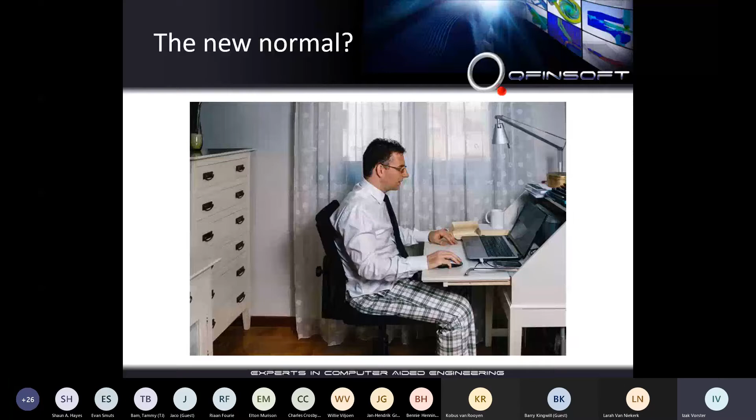A couple of other things have changed as well. We changed the way that we do washing. It was quite a challenge to do all the cooking and the dishes and everything at home for a long period of time. Some of you might have brewed some pineapple beer, or run out of wine during this time, but it was a challenging time. I think we'll never have a time like this again. It was an abrupt change to normal daily living. You really got to know your wife or your husband and your children. That was one of the challenges, to spend so much time together. But I think in the end, the lockdown has revealed a lot, and it's helped a lot too.

Just a little bit of perspective - this figure is from the 29th of September on the pandemic that we're currently facing. I think the world's reaction was very hectic to this, with reason. It's a serious virus. If you look over history at all the pandemics, I think we're still growing with COVID. We don't know how long this will last, so obviously businesses have changed to adapt to this and make sure that they can still be profitable.

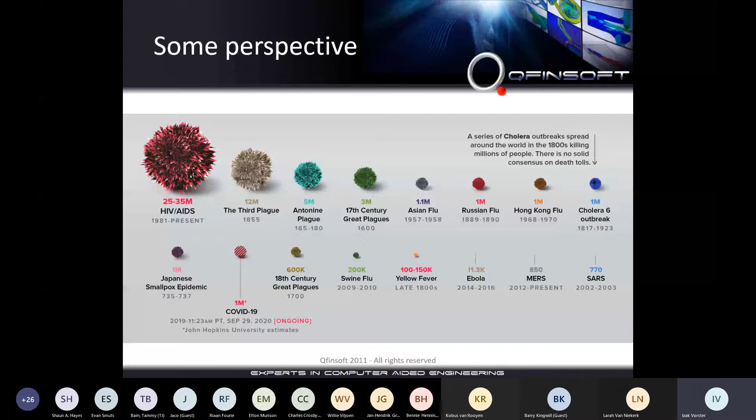Different ways of working, because we don't know how long this will actually take. Some research shows that there's always a recovery from these pandemics and economic crashes, and there are different ways this can happen - in L shapes, U shapes, W shapes and V shapes. It looks like the consensus is that it will take about 2 years to recover from this. We'll see how it recovers. Some countries have gone into a second lockdown period, so that might affect things as well. So there's a lot of uncertainty about this.

Hopefully we've got a bit of an U-shaped or V-shaped recovery that really just flattens things a bit and then it carries on growing again.

A bit more specific research for South Africa shows that we haven't had the greatest economic growth over the last couple of years, and they're predicting a bit of negative growth, 0.5%. Whether this will be the case, we don't know. We'll have to wait and see.

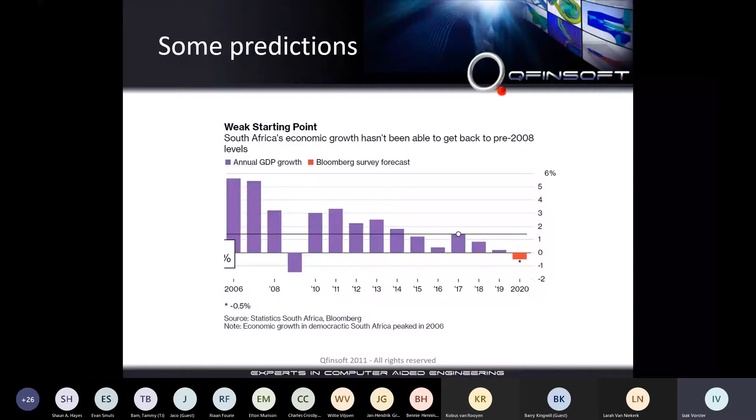But it does state a point: we have to change the way we work to be profitable and to keep on being effective and surviving this whole crisis. I think that's what most companies have done over the last couple of months. Unfortunately, some companies have taken pay cuts to still keep all the employees. Some companies closed down, unfortunately, which opens up other opportunities again. So it will be an interesting two years coming, I think, for South Africa.

And then the other thing that changed for me tremendously is, I'm a sales guy, so interaction with people is kind of my food every day. The social distancing impacted that a lot. I think the first time we all got back at the office for Spring Day Braai, we spent a lot of time just chatting and interacting with each other socially again. So I think it's something we miss.

Luckily we've got online. Imagine we didn't have any internet or anything during a pandemic like this and lockdowns. Can you imagine what life would have been and how depressed people would have been? I think we are made to interact with people. So that's why we have these online sessions, luckily, and we can interact with each other.

Things that we've seen from our clients mostly is a new way to work. There's about 80% of people working from home, from this report.

The cool thing for me of working from home was that there was no traffic. I drive an hour to work every morning, an hour back. And when I see two clients, there's at least three hours on the road. So that's five extra hours a day. I think I was more productive, I had more meetings a day. Some days I had six or eight meetings just because I didn't have to drive all this way on the roads with traffic and stress.

I think we are less stressed as well by working from home. It depends what you're doing. We saw a lot more meetings. A meeting was very easy to arrange, and people would allow you some of their time if it was a quick Teams meeting, like you guys today. So we appreciate that. I think that increased communication between departments especially.

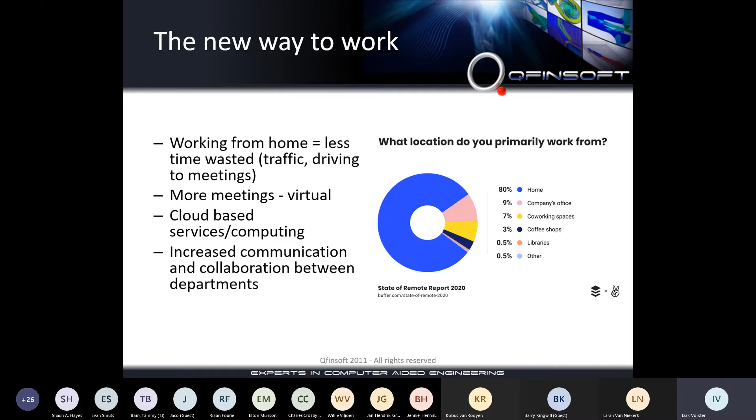We saw uptake of cloud-based services in computing. People were working remotely, so they didn't have access to some servers or solvers at work, so they had to work remotely. Some of the cloud computing was utilized, and there was a lot more collaboration. We had very cool meetings with departments and department heads down to the users, which I think was a very cool thing out of this COVID crisis.

The second thing we saw a lot is we got some cool software requests from people who wanted to do interesting things. In some industries there was a lot of time to restructure and rethink the goals and visions and where they want to go. There were a lot of new ideas, and that was good for us. So we had very cool projects that we provided support on, and people are definitely innovative in their thinking about how to improve their businesses, how to look at different simulation solutions to replace some testing, prototyping, etc.

We also saw the simulation complexity increase. The kind of technical support we got was a bit more advanced in most cases. I think those simulations that had been lying in a cupboard for a long time started coming out and people started using them. In general, I think we get increased complexity in simulation over the years as people get more advanced using the software.

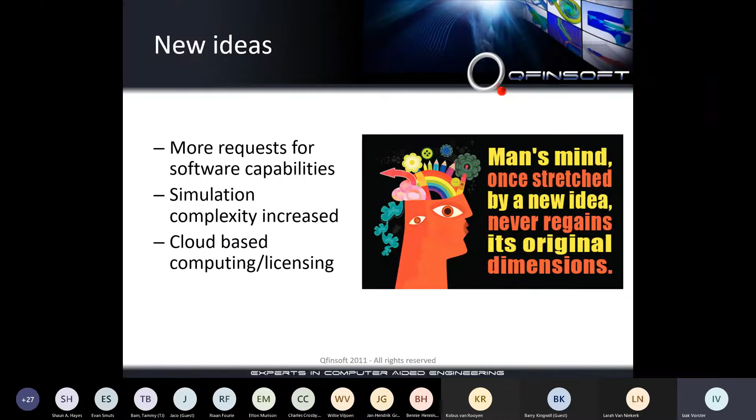And then obviously there was still a lot of cloud-based computing and licensing going on, with people who wanted to get new guys to use the software. Some people employed new guys and they wanted some access to the software.

The downside of what we saw, well it's actually an upside for us as well, was the uncertainty of this time. There's definitely economic uncertainty, so investment in new technology and tools was a bit lower than usual. I had some POs cancelled after being sent due to the uncertainty of this lockdown and when it's going to happen again. There were a lot of critical issues with cross-border work, so we felt that definitely.

The interesting thing though is that we managed to get more than 98% of our renewal rate going. So I thank every single customer on this call for still supporting us. I think it shows value in the technology and in the software, that people are seeing value in our software, I would like to believe. And that really helped us keep our team and pay our salaries and go forward. I think we are right, so thanks for that.

It's also a very indicative gesture to see how this technology is getting more accepted. We had a lot of meetings with senior design engineers and engineers that weren't used to simulation, which we'd never spoken to before, and they started to believe the results we're getting from simulation. They wanted to understand more. There was always a deeper dive into the technology after these meetings.

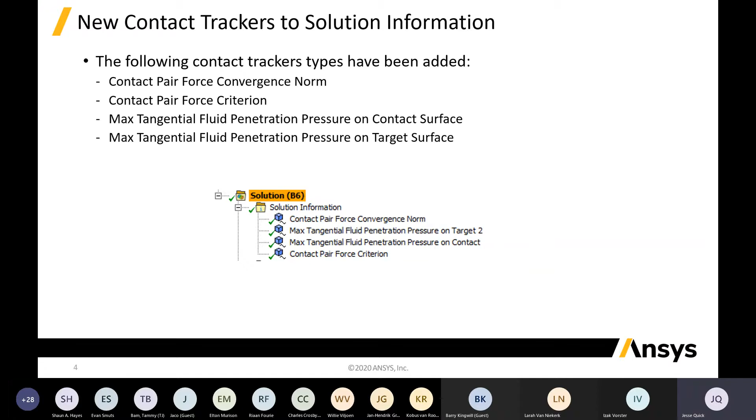Another useful addition is for sub-modeling of thermal analyses. You now don't have to go into Workbench and link up all of your systems. Now it's as easy as reading in your results file. If you know where your results file is, you can import your thermal stress and thermal loads, and add that directly into your simulation from mechanical, without even exiting the interface.

Now onto the mechanical graphics and post-processing. This is a small one, and it also ties into one of my favorite topics, scripting. They've done a lot of work on the scripting console. But now for post-processing, you can create custom legends with color bars, and use these for all of your designs. You can export the legend and read it in every time when you run your simulation. This allows very fine control over your legend and how you display your results, which is particularly nice for keeping things consistent for reporting purposes and so on.

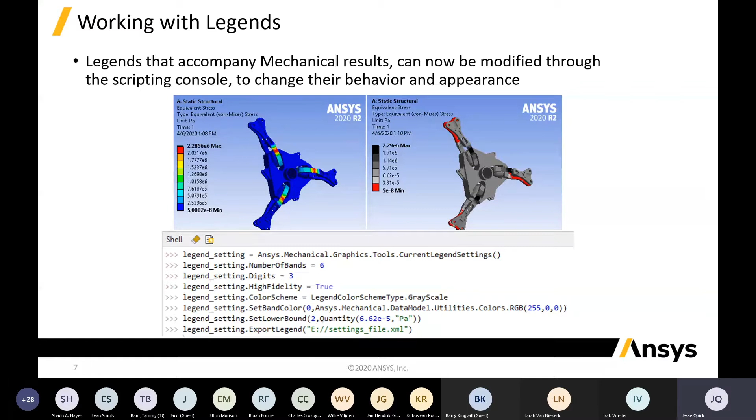Then onto mechanical, the MAPDL migration to mechanical. These are the more solver-related and contact-related improvements. One that stands out for me is the shell-to-solid contact enhancements. Now mechanical issues a SHSD MAPDL command for you, which improves shell-to-solid modeling. This is typically very nice because we like to use a lot of our shell models. When you use a bonded MPC contact, under the formulation, you can change this formulation, which allows additional settings to improve your solution accuracy.

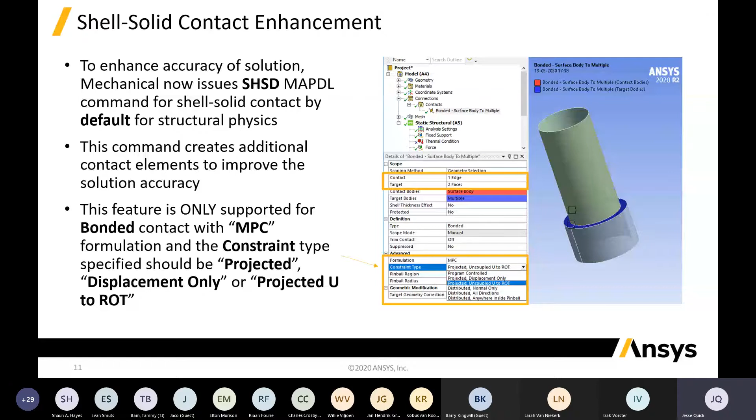If you're not exactly sure what that means, this slide shows an example where this has been used. If you look at the top left and top right of the model without the SHSD enhancements, you get this sort of wavy phenomena on the top left and right. Now with SHSD, we've got a much smoother model, which makes a lot more sense and looks a lot more accurate.

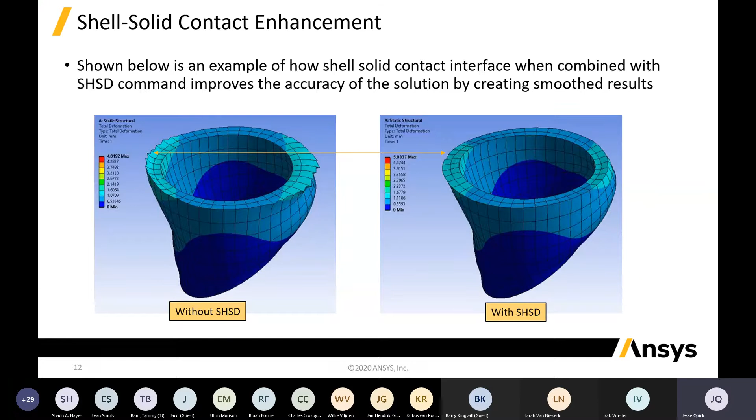Then we also have our quasi-static solution in the static structural analysis. For the static structural analysis, when you have a static analysis that occurs over a long period of time where it's actually transient...

So if you think about maybe you have a load on top of a can and you just keep pushing down, eventually that can's going to start to deform. Then you would want to use a quasi-static type of analysis, and this has been integrated directly, so it's very easy to go and turn it on. By default it is off, and you could easily go and manipulate these settings directly in Mechanical.

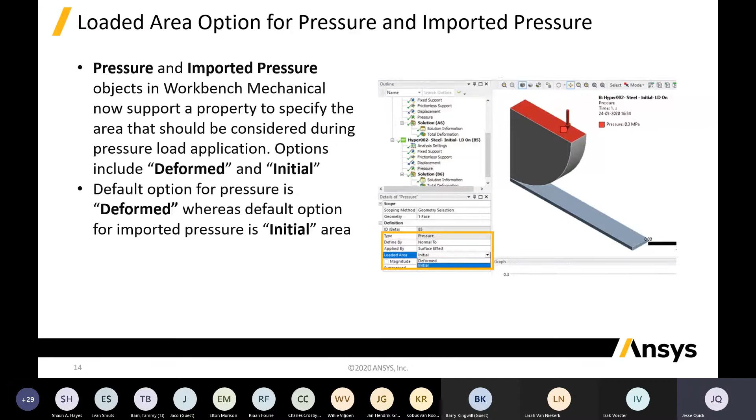Then loaded area options for pressure and imported pressure. This is quite nice. So now when you are applying a pressure or importing a pressure, this pressure will consider the change in shape of the model as it's being applied. So you can include deformed and initial, meaning it will either use the deformed area or the initial area. It is scoping the pressure throughout your simulation.

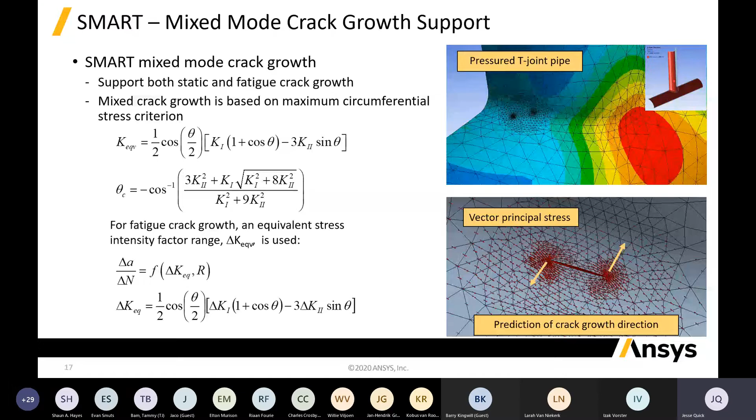Then one of the other key areas they're trying to improve a lot is the fracture and smart crack growth solver. With the smart crack growth solver, now we have mixed mode crack growth support. If you look at the visualization, what it does is support both static and fatigue crack growth, and there's all the equations there for reference. The mixed crack growth is based on the maximum circumferential stress criterion, and this is becoming more and more important to simulate these types of crack growth phenomena.

Additionally, this has been included within our fatigue model, so there are additional fatigue models: Walker's and Forman's equation. You can also input your own tabular table of data points that you would like to simulate.

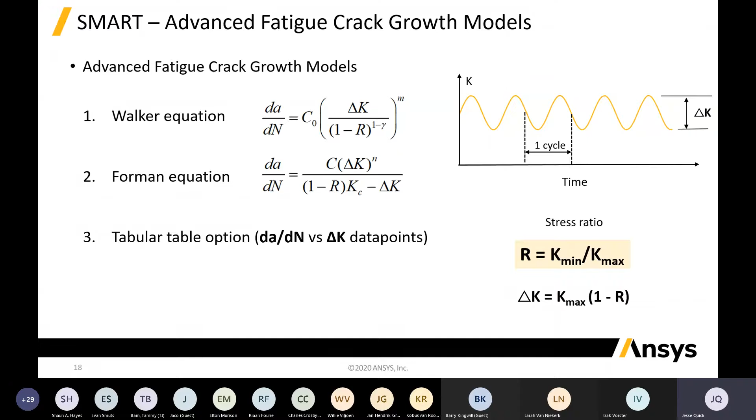Then for bolt preloads, this is a particularly nice one. We always know we have to apply preloads to our bolts, and this is particularly important for all different kinds of simulations to increase the effective area that the stress is acting on. Previously, with the PRETS179 model elements we were using, you could see as the bolt rotated, it lost a bit of the scoping for the initial pretension we applied. But now when we undergo a large deformation or large rotation, we keep that exact tension and initial deformation as we rotate our model.

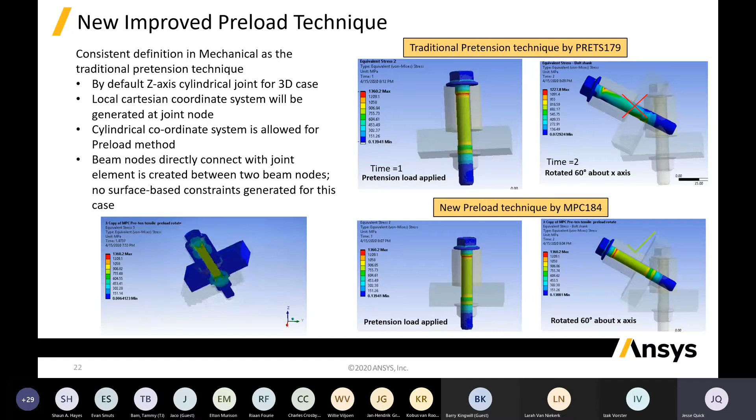Then there's some general contact robustness improvements. For non-linear simulations where we use MPC contacts, in the previous iteration, 2020 R1, we got divergence within these contact regions. Now they've improved it so that in 2020 R2 we get much better convergence performance.

And then another one I quite like is the enhanced displacement convergence check. Initially it will calculate what your displacement should be, and if you are under that value, you get a displacement convergence. But now, to enhance this, after the initial check it goes and updates your convergence check for displacement, updating the criterion to give us a better estimate.

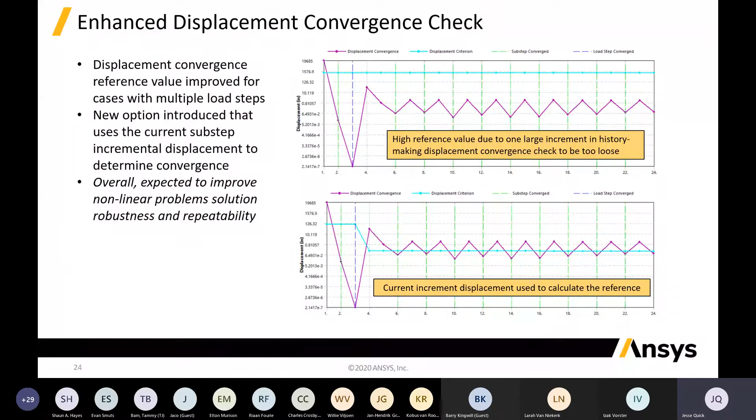Then a lot of work's been done for structural optimization. They've included new capabilities such as geometric constraints for volume, mass, the center of gravity, and moments of inertia, and this can be scoped to as many bodies as needed. There's also optimization regions, to create as many optimization regions as components in the model. So for each component, you can have an optimization region with its own set of manufacturing constraints, and then combine these in unique ways for the optimization.

And then for the static linear analysis, there's some UDF work with displacement and reaction forces, which is a beta feature, and there are some other beta features, but there's a lot of work being done on the optimization side.

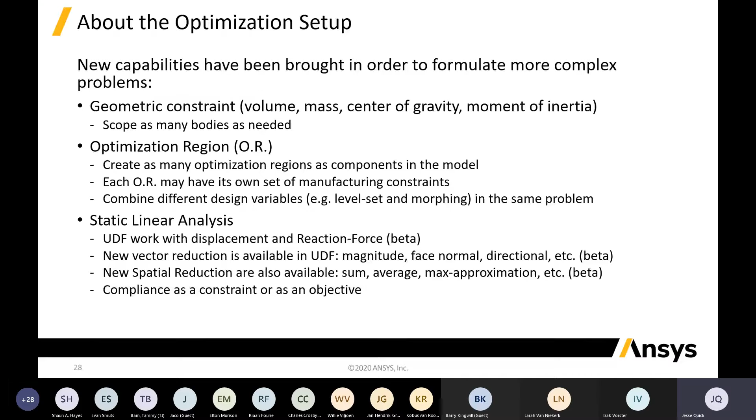They've also improved our validation. So when you are doing your optimization study for topology optimization, they've now improved the workflow such that when you're done, you can export smooth STLs and use that for a validation study rather than having to go and do a whole lot of cleanup, which you can spend a lot of time on.

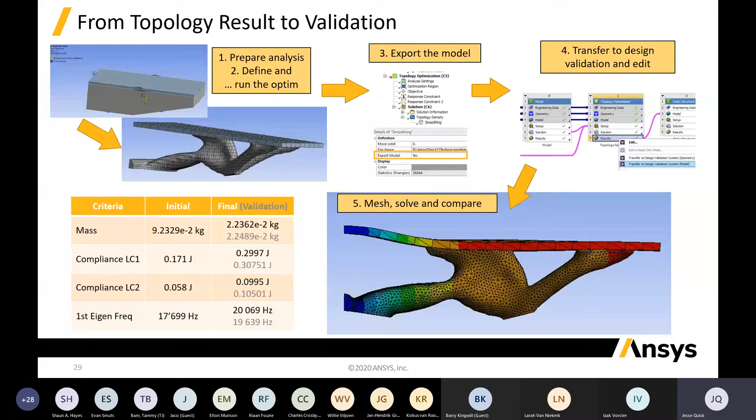This is also carried over to the lattice type of optimization studies, where you can improve the workflow using a similar methodology.

Then for explicit dynamics, one of the nice new features they've included is smooth particle hydrodynamics, supported for the LS-DYNA and explicit dynamics solvers. You can specify particle objects with a particle mesh method, and they've just included this in the visualization process.

Then LS-DYNA, which is obviously new all around. I just wanted to take out a couple of slides for LS-DYNA to show what's new on that side, but obviously a whole lot is new in the LS-DYNA type of environment.

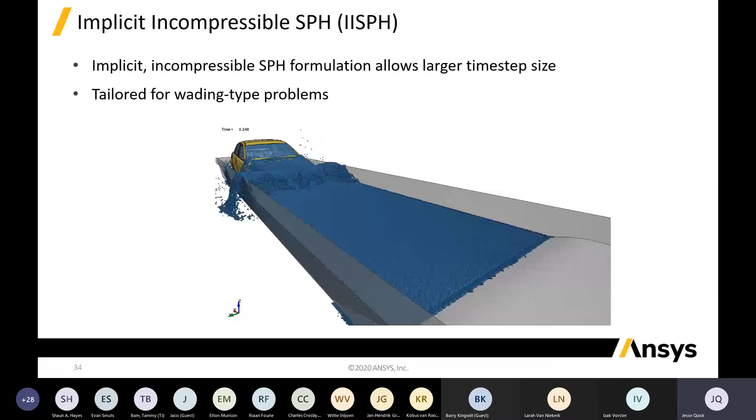One of the cool ones that I found was the implicit incompressible SPH model. This allows us to have much larger time steps compared to an explicit model, and this is tailored for wading type problems. You can see it looks very interesting.

Then there is a moments consistent smooth particle Galerkin model, which is applicable for multiple applications. I just chose some interesting ones, whether it's manufacturing, defense and civil, automotive, consumer goods, and biomedical, most applicable to the industries our clients are involved in.

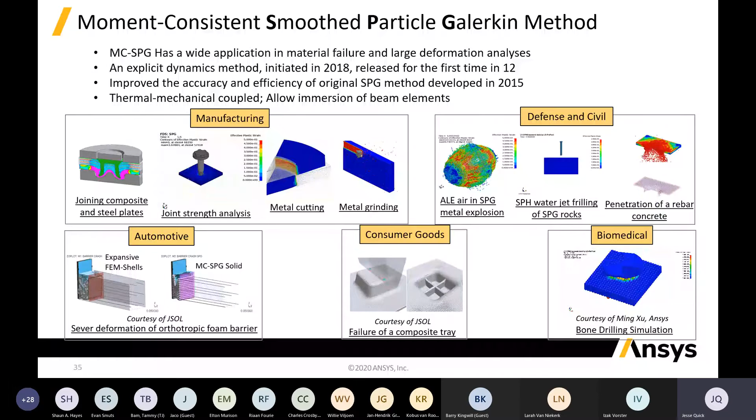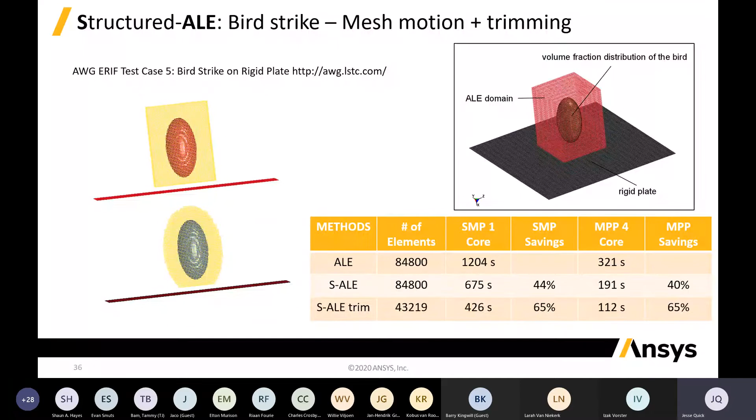Then they've also improved the structured ALE bird strike model. This has just been improved to include some trimming, and this improves the performance of the model and speeds up our simulations. Then onto rigid body dynamics.

For rigid body dynamics, they've included friction in nearly all of our joint type models. Previously it was available for translational, cylindrical, and revolute joints. They've now included it in universal, spherical, slot, points on curve joints, and imperfect joints, so now we can model friction for all of those.

Then Aqwa, we have one or two clients that use Aqwa, so this looked quite interesting to me. We now have time domain pressure mapping for our hydrodynamic response to static structural, so now we can map our time domain for our Aqwa model pressure in a much more simplified and automated manner. When mapping everything from our Aqwa load mapping ACT, we can read in the external surface and the internal pressures.

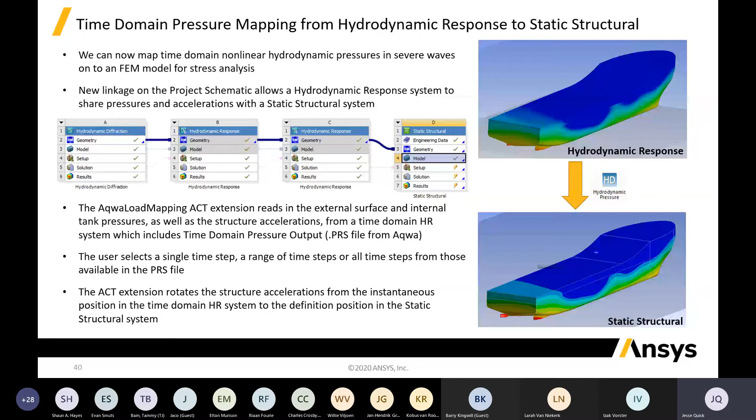Based on the time frames that we set, we can actually just map it directly, and it will improve our workflow and map that onto our static structural system every time.

Then for Ansys Sherlock, for all of our electronic simulations, they've improved the workflow from the beginning, from SIwave to Icepak, mechanical, and Sherlock for our reliability analysis. In general the workflow has been improved, and with that they've included Sherlock directly into Workbench, so it's integrated directly there. This simplifies and speeds up the way we would normally set up these types of problems, making it more familiar rather than having to exit the Workbench environment and then read it into Sherlock every time.

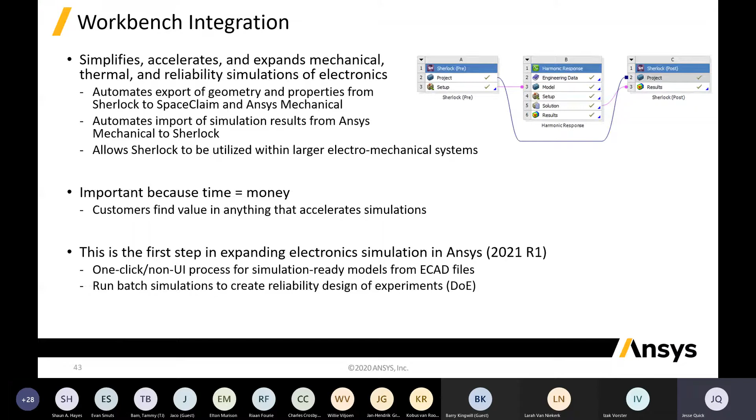And then on that note, they've also gone and improved the Sherlock export to Icepak, with integration improvements from mechanical and thermal all the way to Icepak in the end.

So that is effectively the key features that I thought I should run through quickly for the mechanical side of things. Thanks, and I think that's it from my side. If there are questions, I'll address them at the end, and I think it's on to the next presenter, which is Keith, if I'm not mistaken.

Thank you. Yes, thank you, Jesse, I appreciate that. Thanks for squishing all of that into that time slot. So next up is Keith. Keith, you ready? Yes, I am, let me get started. Cool.

All right, so hopefully you can all see my screen. Good morning to you all, and thank you for attending. I'm going to be giving the updates on the CFD tools that Ansys offers, and again, there is so much that has been released, so I'm just going to try give an overview as best as I can.

So we'll start with the meshing workflow. The first thing is wildcards can be used in automatic selections from any list in your fault-tolerant meshing and your watertight meshing workflow. The wildcard is preserved in a journal, commands for future execution.

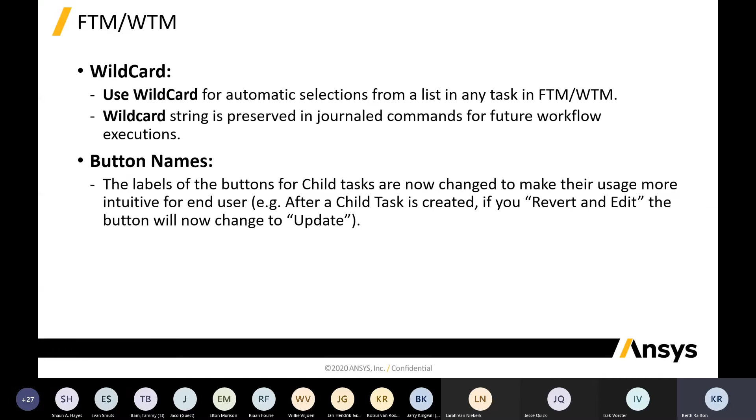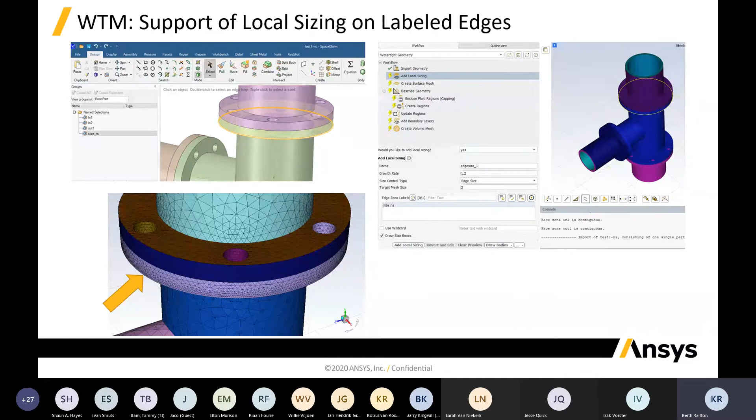One nice feature is that local sizing can be applied to a labeled edge. The edge needs to be labeled in SpaceClaim first, and then in Fluent Mesher's advanced settings, you specify that you want to use name selections, edges, and it will apply a specific sizing to that edge.

One can now import a surface mesh from an existing mesh or case file, with the flexibility to selectively remesh specific surfaces rather than everything. It also supports regional specific sizing, so you can specify the maximum cell size and the growth rate in each zone, each region.

With poly and tet, you can specify both max cell and growth rate, whereas with poly hex core and hex core, there's obviously no growth rate, so you can only specify the maximum cell length. The poly hex core and hex core have also been extended to solids, so it's a completely compatible matrix of mesh types and extraction methods for solid regions.

There's also continuous prism layers for polys and poly hex core for fluids. This is a new continuous option for the post-improvement method, which creates continuous prisms without stair stepping, and it's available in fluid regions that use poly and poly hex core for volume fill.

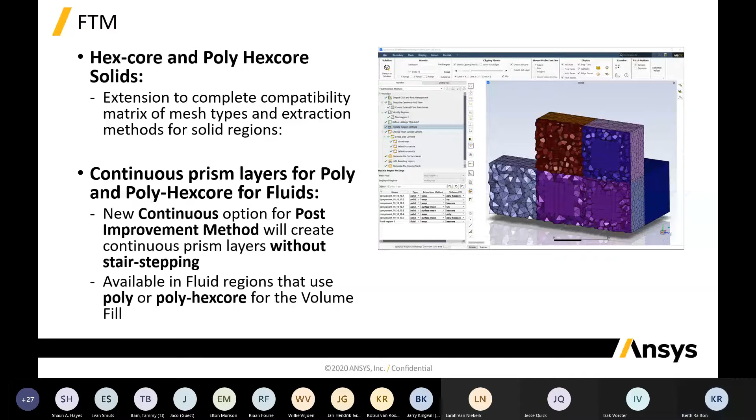Okay, let's get over to multi-phase and DPM. There's a couple new features here. The first is the new streamlined multi-phase workflow. It's new and intuitive, making it a lot easier to access the different phases, so it makes setting up a multi-phase case in Fluent significantly easier.

Then there's a regime transition for transitional flow, which is very handy. For Euler, it's typically recommended for interfacial areas smaller than the grid size, and then you can use interfacial tracking if the length scale is larger than the grid scale.

Then the new GENTOP, or generalized two-phase flow approach. This model starts functioning once the large bubble group has reached a critical volume fraction, and the model works completely within the Eulerian framework, predicting generalized flow very well.

There's also a filtered two-fluid and EMMS subgrid scale model for gas-solid flows. Normal homogeneous drag models can yield poor results for large-scale fluidized beds, so the new filtered two-fluid model and EMMS drag model are introduced, which account for subgrid scale effects on macroscopic flow. This makes large-scale fluidized bed simulations much more affordable and predicts realistic expansion and hydrodynamics.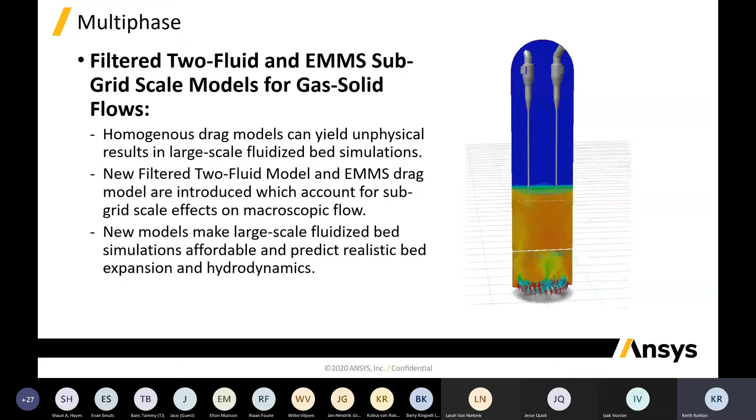There have been a number of changes to the robustness of VOF, including the generalized variant of body force weighted pressure interpolation, which gives better convergence, better robustness, and addresses limitations of the existing body force weighted method.

Then the hybrid NITA improvements: the velocity-based instability detector mechanism has been improved, which helps with the stability of the NITA solver. The turbulence damping improvements have also been extended to the K-epsilon models, giving better resolution for gradients in the lighter phase.

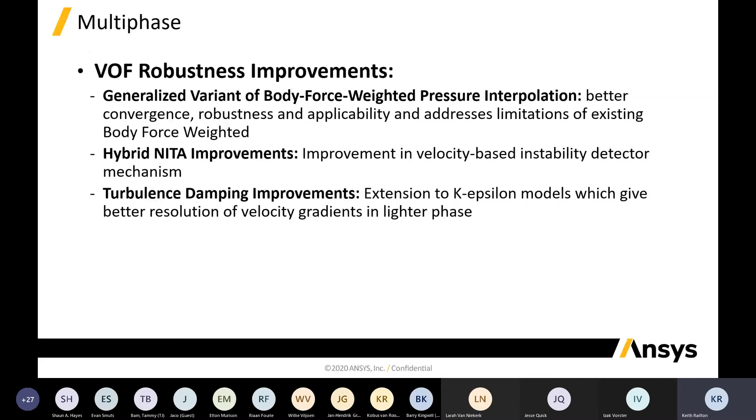Then a new droplet breakup model has been added, the Schmehl model, which is going to be implemented both in Fluent and CFX. It's typically used for gas turbine injection and fuel injection - a very good method to use.

Then the high resolution tracking model capabilities: the capability with DEM is now a fully supported feature in high-res tracking, and the capability with moving deforming mesh is now also supported. That's for DPM.

Okay, then there's some other physics and models we can talk about. The first is the general turbo interface for combustor and turbine stages. All species models are now available within this, and the frozen rotor and transient rotor stator can use SIMPLEC in the segregated pressure-based solver.

Then non-equilibrium wet steam can also be modeled. This is important for steam turbine modeling, and it was only previously available for the density-based solver. Now it's also available for the pressure-based solver.

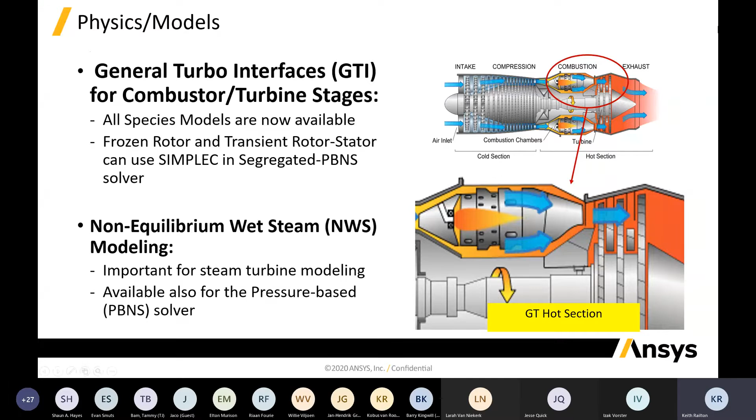Okay, impedance boundary condition inputs utility. Fluent requires inputs of complex poles describing frequencies. So the new utility fits the impedance input data based on experimental acoustic material data.

Then on the radiation and heat transfer side, the Monte Carlo model has been enhanced, so you can specify boundary sources on internal opaque walls, which is very handy, and additional wall fluxes for post-processing are available. You can also write S2S files in CFF-based .h5 file format, which is very handy.

One thing that's been needed for quite some time is the heat transfer coefficient based on a specific Y plus - that's been changed. New field variables are used for fluid temperature at a specific Y plus value for HTC computation, and you can specify the Y plus under user defined preferences. Default is 300, but you can change that. New post-processing quantities include the Y plus based heat transfer coefficient and the Y plus based heat transfer reference temperature.

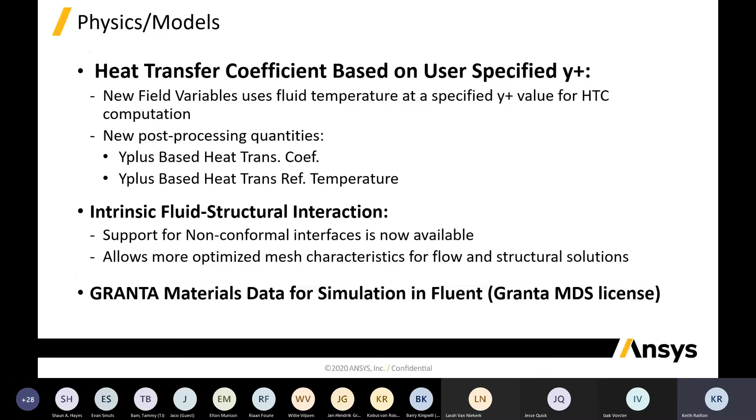On the numeric side, the correction form option for the pressure-based solver has improved robustness and a 5% speed up. As before, the multiple reference pressure formulation is now default. You can do mesh adaptation for overset meshes, which will improve mesh connectivity using overset methods.

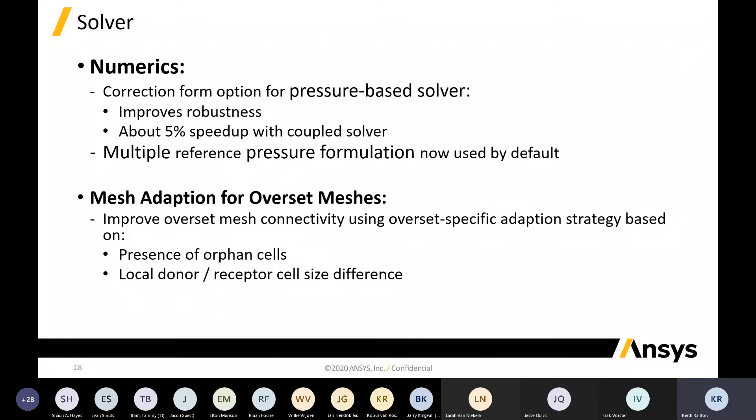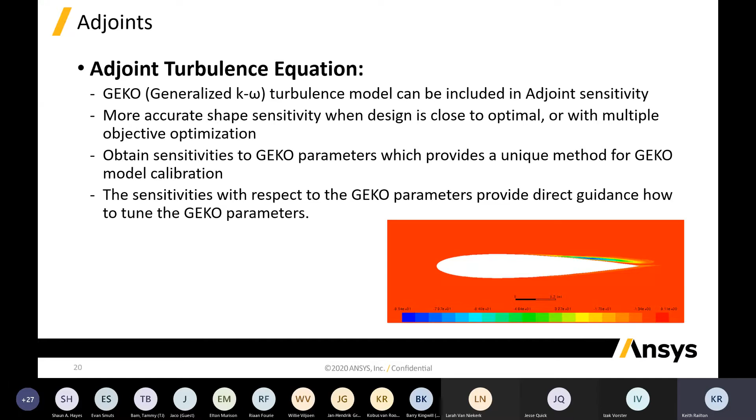On the adjoint and design tool side, the adjoint turbulence equation - the GEKO generalized K omega turbulence model - can be included in the adjoint sensitivity. This is very handy because GEKO has tunable parameters and can optimize your turbulence model specific to your application.

In the design tools, you can compare optimized mesh and reference mesh easily. There's also bounded surfaces which can be applied as a boundary condition, and simplification of exposed settings for regional conditions - reorganized different conditions, much simplified region conditioning, especially for invariant conditions. There are also extensions of direct interpolation, supporting symmetrical regions and motion conditions for both Cartesian and cylindrical coordinates.

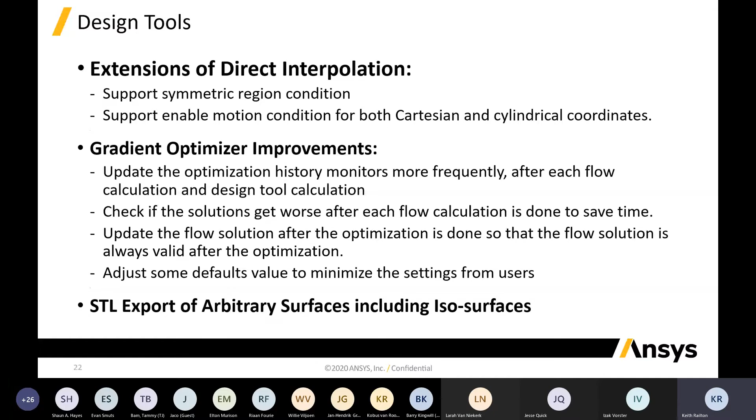Then there's gradient optimizer improvements - the optimization history monitor updates more frequently. There's also STL export of arbitrary surfaces, including ISO surfaces.

Last thing I want to talk about is expressions. Patching can now be done with expressions, so you can patch and initialize a solution with expressions. Material property definitions can also be defined using expressions. There's a new diagnostics plotting for expressions as well as material properties.

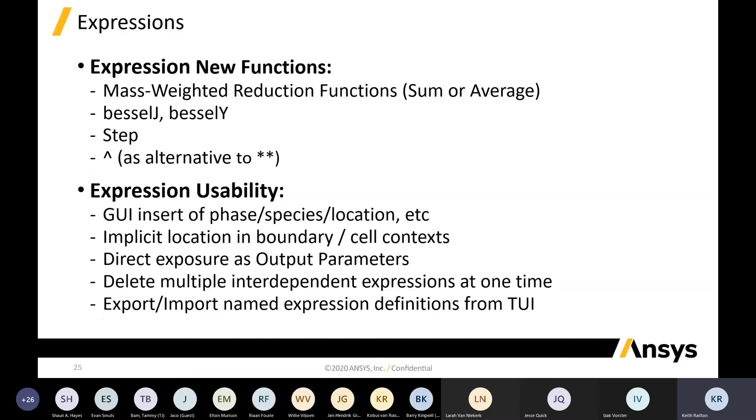There are also new functions for expressions, such as weighted reduction functions like sum or average, and you can now use the hat symbol instead of two stars to do a power. The expression usability in the GUI has increased and it's a lot easier to use.

Then there's graphics post-processing - there's been a few manipulations on the mouse movements and buttons, and it's becoming more uniform throughout the different tools that are available.

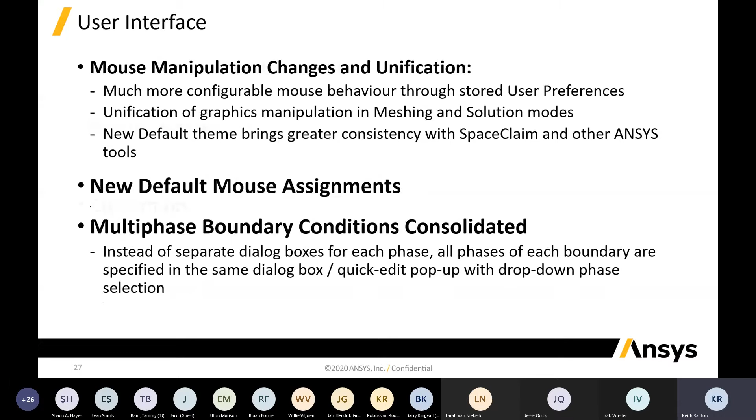The multiphase boundary conditions have been consolidated - instead of multiple separate dialog boxes, you can access the phases using each boundary condition. You can mesh edges off by default now, and you can save scenes - there's a shortcut for saving scenes, and new additional color maps are available.

All right, I think that is enough, it's running out of time. I would like to thank you for listening, and I hope it was useful. A lot else has changed, so start playing around and see what is available.

I think it is now Evan to take over. Thank you very much, thank you Keith. That was good, Evan is up next. So if Evan is around - can you hear me? Yes, absolutely. Please go ahead.

Morning everyone. What we're going to look at now is what we've called the EMAG or electromagnetic products, which lumps a whole bunch of different products together. But I'm really just going to focus on Maxwell and HFSS, which are the two main packages in that category.

Maxwell is a general solver for low-frequency applications, and one of its major uses is for electric motor design. There's been a lot of development in Maxwell for that and all the tools related to it, particularly because industry trends are looking for electrification, especially motors for electric vehicles.

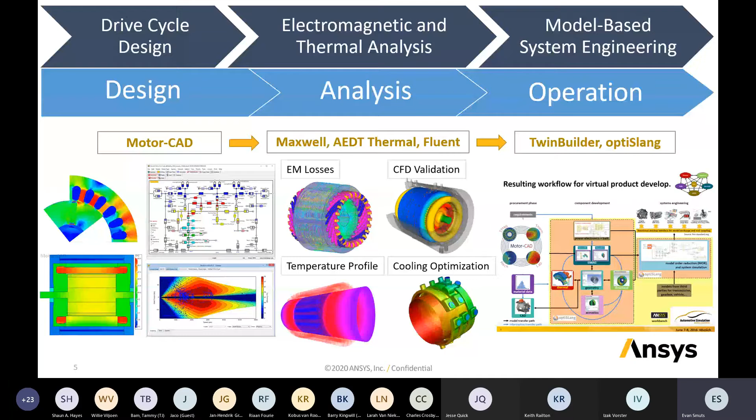integration with mechanical, looking at the acoustics of the engine, the vibration and the noise generated from that. And that's even now being coupled with a VR experience, which is a fairly new product in the Ansys range. The idea is that if you characterize the full vibration frequencies of your motor, you can actually generate a sound file for that motor.

So I'm not sure if you guys can hear it, but you can actually hear the motor whine as it revs up. We can't hear that even. You can't hear it, okay. But believe me when I say you can actually hear the motor whining as it spools up there.

So that's quite a nice integration to really get the full analysis of the electric motor. You can see on the left, we talk about a product called MotorCAD. For those who aren't familiar with it, it's also been released within the last year. It's kind of like RMxprt for those who know a bit of RMxprt, except that it adds a lot more features to it.

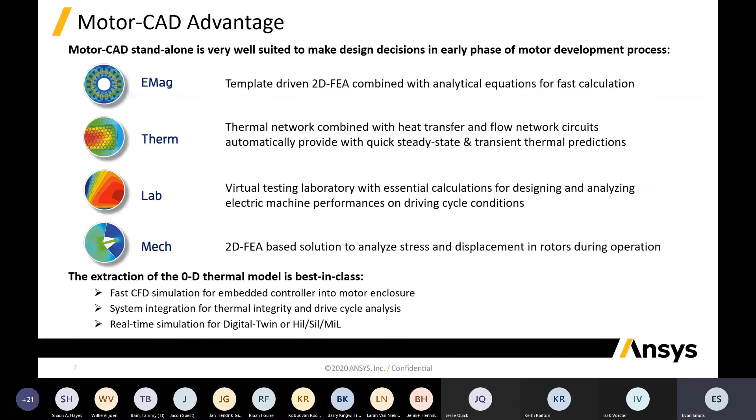So before you've gone and done a full detailed analysis, you can actually just throw out a couple of different designs and hone in on your optimum design much quicker. That's a new standalone application for MotorCAD, and it links with all the other physics as well to do a more detailed analysis later down the workflow.

Okay, then looking at some of the Maxwell side, bringing in for RMxprt, you can actually bring in a custom CAD geometry. So it's not just working with the UDPs in RMxprt, but you can actually bring in CAD files for the different components in the motor, so you can get slightly more detailed or more custom design for your application.

What's really quite handy is looking at ways to streamline the workflow setup within your motor analysis. Typically, you're going to have some sort of periodic geometry, and because you don't want to solve the full motor shape, because that's going to take very long, if you can break it up into little slivers, that will speed it up. But then also setting up the model to create that little sliver is also sometimes a bit time consuming

or painful. So the idea is that you can set up your model on the full geometry, and then you can actually get Maxwell to automatically slice it up and solve it for you. So it just saves you a little bit of time on the setup there.

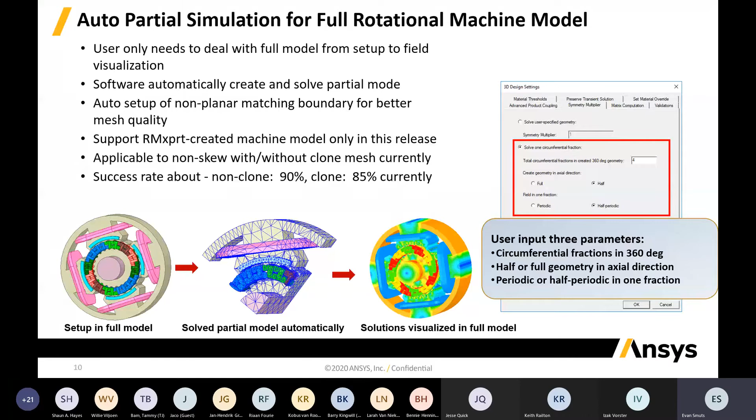Then the new meshing option - this is an enhancement of the existing TAU mesher. This is the TAU Flex mesher, and it builds on the existing meshing technology and just gives a bit more robustness, especially for more dirty and tricky CAD geometries. It just helps you get a much more efficient use of the mesh.

And then what's also quite nice is using this dynamic surface resolution setting - let me place a pointer here - so it basically groups the mesh around complex geometry like high curvature, but then gives you less mesh where the geometry is much flatter and simpler.

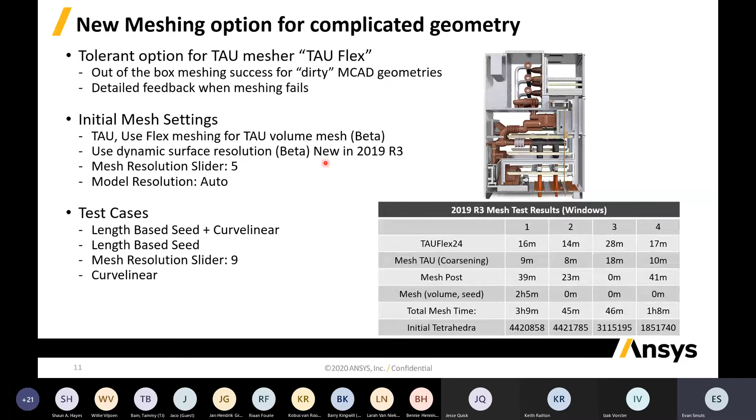Then also in the previous release earlier this year, we brought in a new A-Phi solver. This is an additional solver alongside your magneto static solvers and things like that. But the idea is that this is particularly used for things like bus bars and IGBTs and flat PCB boards and things like that. So particularly for your high power applications, this is a very fast and efficient solver for that.

With all the concentration on multi-physics, it's about trying to simplify the workflows and bring everything together. So you can actually now bring elements of a mechanical FEA analysis into the electronics desktop. You can look at either a modal simulation, just to look at the basic vibration response of the casing and geometry, as well as a thermal analysis. And you can do all of that within the electronic desktop - you're not having to export or go back out into mechanical. So for some simplistic analysis, at least for now, the workflow has been much more simplified.

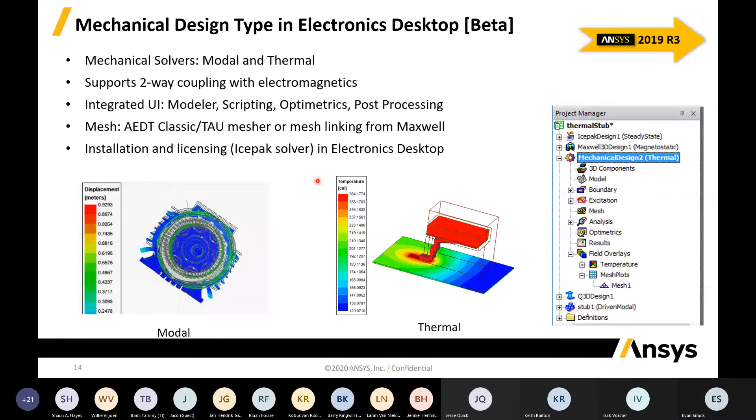Something that's had a lot of fanfare over the last year or so is this idea of greater materials libraries that have been added to all the solvers. At the end of last year, the last release, some initial materials were added to the Maxwell database, but this database has been extended. Now you're getting even 500 plus material data points from different manufacturers. So it's actually manufacturer specific, and it has all the magnetic material properties that you would need to do complex physics within Maxwell. It's putting all that information there ready for you to use.

And then there's also been some other enhancements for materials, looking at things like temperature dependency - setting up your BH curves, having different curves based on temperature, and the solver will interpolate between them. And then also things like anisotropic core loss coefficients and temperature-dependent core loss coefficients. So there's been a lot of development there for a little bit more realism and accuracy on the material side.

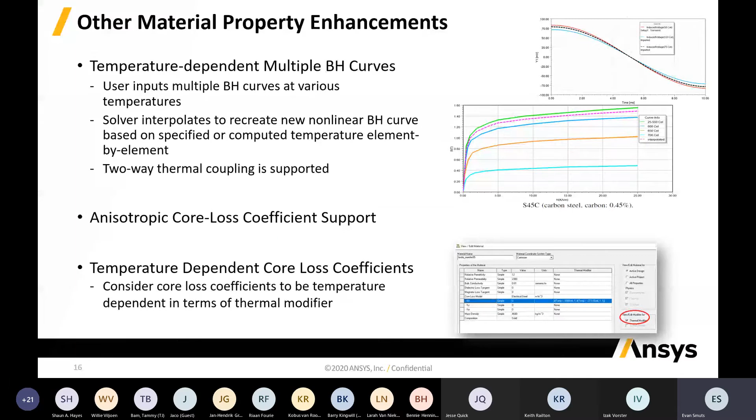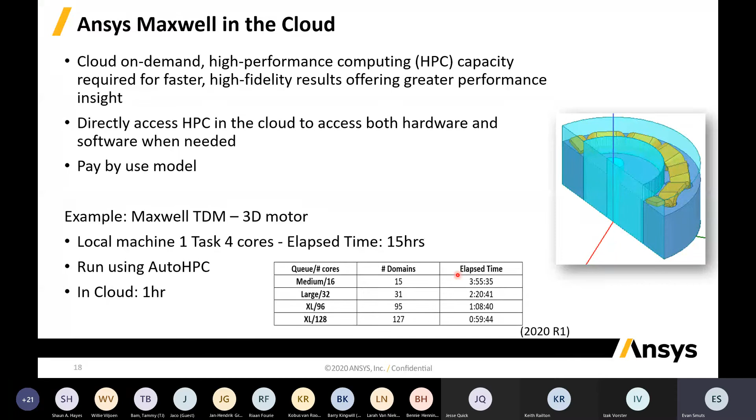Then on the performance side, about a year ago, the compatibility of Maxwell with Ansys Cloud was released. And since then, there's been a lot of development, particularly using things like the time decomposition method, and you'll see some other advancements with the domain decomposition method. You can really leverage the large scale computing power of the cluster and really drop your simulation time - so instead of waiting half a day, you can do it over lunch and get on with your work.

Within the solvers, there's been MPI support for the domain decomposition method for the magnetostatic solver type, which wasn't available before. This can allow you to now run distributed memory over different nodes and run much bigger problems, hopefully getting a good speed improvement there.

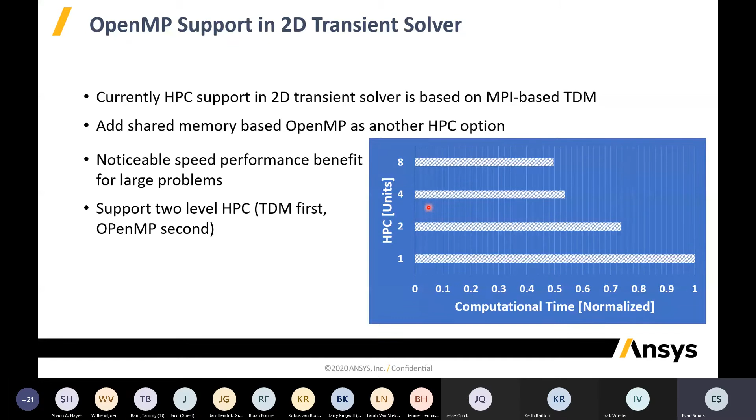Then on the flip side, for the 2D transient solver, we now have OpenMP support, using the shared memory option, which can benefit some of the larger problems for the 2D models. And then also some GPU support for frequency sweeps - GPUs can't be used for all the solvers within Maxwell, but for certain applications it can be quite handy, so now we've added a bit more support for that.

Now we're focusing on HFSS for the high frequency applications. Looking firstly at HFSS 3D - so this is the HFSS product. Again, lots of development for requests from industry to look at large antenna arrays. There's been a lot of development and tools focused around simulating these kinds of arrays.

Firstly, the 3D components that have been available within Maxwell and HFSS are now used to build up an array. We take our array and build it up in smaller pieces, little regular repeated pieces, and these will individually be 3D components. We can create our phased array pattern based on these components. So you can see we've now designed the layout, and HFSS will bring in all these different 3D components and construct our full phased array. That's been a lot of work there to simplify the workflow.

This is typically a lot of emphasis on development with 5G and arrays for that application. And further, what's not mentioned here is this has also been allowed to be meshed in parallel as well - so these individual elements can be meshed separately, also speeding up that process.

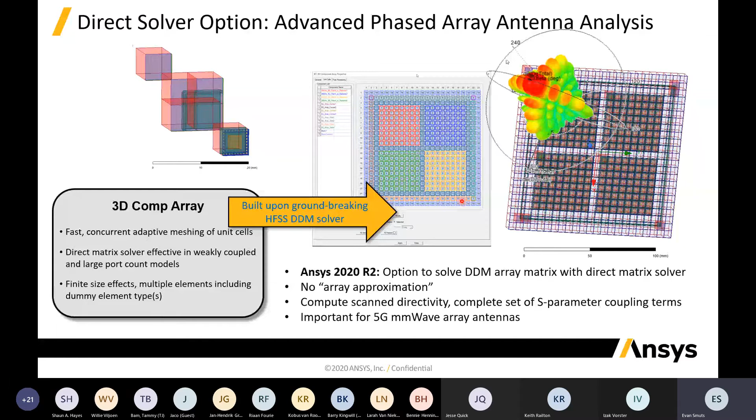Following on the 5G thread, there's obviously a lot of emphasis around the world to develop 5G products. So there are some toolkits and wizards within HFSS now to create different components, standard parameterized components. You put in your details and it'll generate the components for you, and then that also sets up your post-processing as well. So a lot of the features or the information you're interested in will be generated for you automatically as part of the solution process.

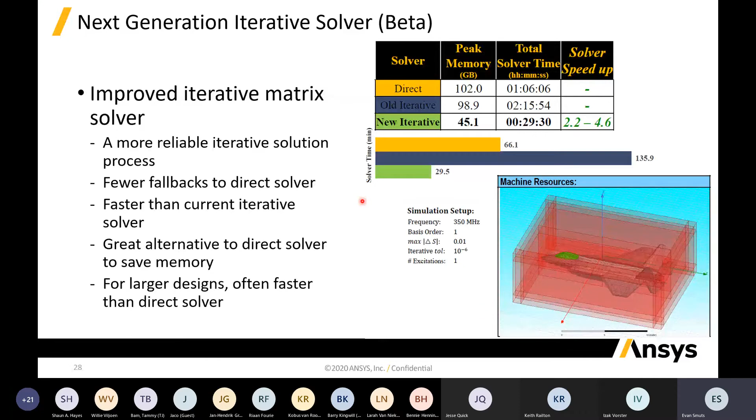Looking at the iterative solver - some people may not know HFSS has two solvers: the direct coupled solver and the iterative solver. By default we work on the direct solver because it's generally quicker and more efficient. We typically only use the iterative solver when there's a limit on memory, because it uses a lot less memory but takes a bit longer as a result. But there's been a lot of development now, making the iterative solver actually faster than the direct solver in certain applications, so you get a memory benefit as well as a speed benefit. It might not give the speed up for all applications, so it's worth checking out for your application.

With more focus on EMI and EMC problems, and trying to analyze designs before they get put into production, there's been a lot of defined templates added to HFSS. As I've spoken about, 3D components are library components you can pull into your analysis, already set up and defined for your particular application, or even full examples. So it's not just a component, it's a full model setup with geometry and everything - a ready-to-run example that can be brought in from the standard library. This can speed up the setup of your model, or at least help you understand how to get the best out of your EMI or EMC simulations.

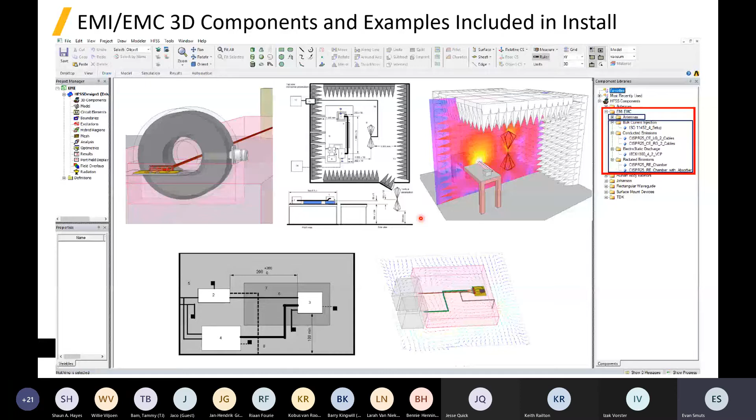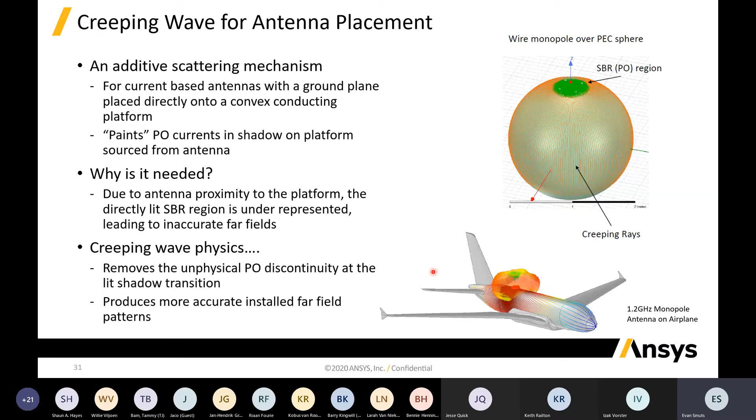Now looking at SBR+. This is the part of HFSS that looks at large-scale systems, particularly installed antenna locations. Creeping wave is a technology we've added over the last year or two, just to help get more accuracy when looking at things like radar cross-section applications. There's been a lot of emphasis on development on the target side, but now we're also looking at the source side, where the antenna is placed, to give the local near field a bit more accuracy and fidelity.

This is not only the creeping wave, but in general adding some near field analysis detail for SBR+, because typically SBR+ is used more for large far field analysis, but obviously you want to see the local performance too. In this case, we've got a 1.2 gigahertz monopole antenna set up on an airplane. We can see the general field as per normal, but we can also now analyze more locally the effect of the structure around that antenna - there are some more examples with different modes there.

A new physics addition, if we want to think of it like that, for multi-paction. This is particularly for space applications where you've got high power density through your components, and you get the breakdown - electronic breakdown of the material. We now add the physics to actually calculate the reduction in performance based on multi-paction.

You can also set it up either manually or automatically, where it will find the limit of the operating point before breakdown, and the degradation of performance, setting various limits there. So maybe you're okay with running in your degraded power area, or maybe you want to stop at the threshold.

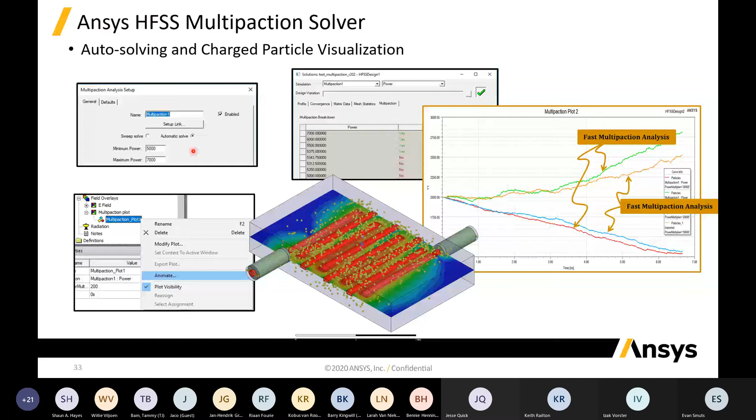Now looking at HFSS 3D layout. This is a version of HFSS looking particularly at things like PCB boards and flat planar structures, so there's a bit of overlap with SIwave.

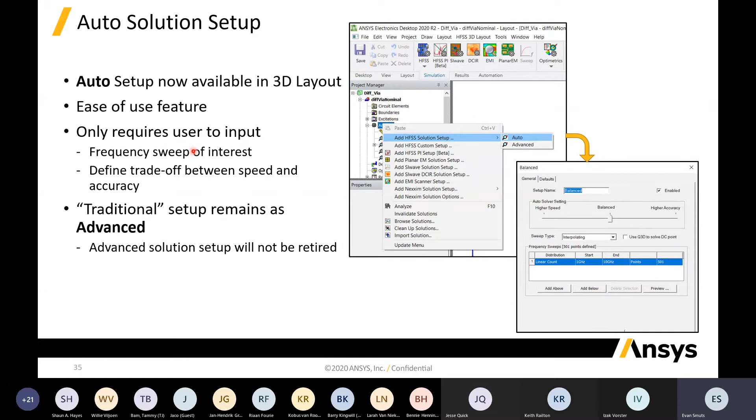Support has now been added for an automatic setup - it will pick all the best settings in terms of accuracy and meshing for you, based on your inputs and frequency sweeps. This speeds up the workflow for the user and often gives you a much better result much more quickly. You can still go to the advanced mode, the old manual method, if you want to use that.

Also for setting up things like pad stacks, you can now draw them within HFSS and just assign them or create these primitives, the geometry primitives, into pad stacks that don't have to be imported from an external source. Then looking at circuit elements, you'd use some sort of S-parameter or RLC type specification for components or circuit elements that you don't actually want to model in full detail, but now you can also describe them with some sort of circuit model as well, something a little bit more complex or customizable for different applications. So this is all handled through the GUI, new GUI components here.

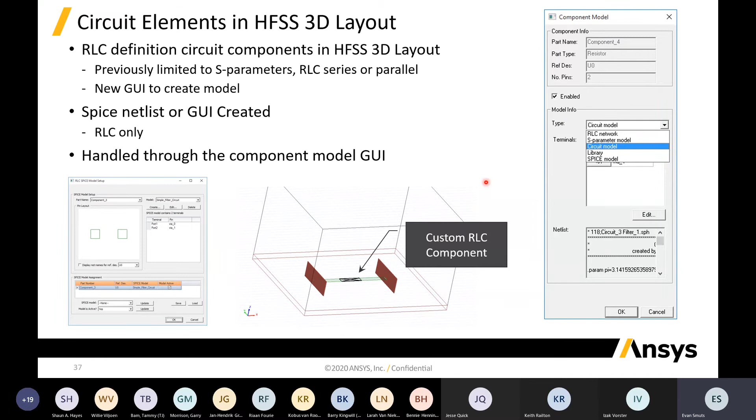All right, then just some highlights for the desktop side of things. I really want to highlight this topic: support for EnSight has been added now to HFSS. For those who don't know, EnSight is a fairly new post-processing application within Ansys. The idea is it can bring in information from all the different Ansys products, and it allows you to do lots of powerful post-processing, making really good-looking, high-quality graphics. So it's a little step above some of the basic offerings in some of the packages. We can now export HFSS data to EnSight, and you can make really good-looking pictures for your reports.

And then lastly, another module that's been added within the HFSS range, but is also a standalone product, is EMA 3D Cable. This is for people looking at doing cabling harnesses within large vehicles like cars or airplanes, where you don't actually want to model the exact detail of each individual cable, you just want to look at the harness as a whole. EMA 3D is based in SpaceClaim, so you use SpaceClaim to set up the geometry of the vehicle and the wiring harness, then you specify all the properties of the harness, like the different cables running within there, their sizes, thicknesses, shielding, all of that. It then runs essentially an analytical model to see how the field will affect the performance of the cable harness, and you can post-process that all within SpaceClaim as well. This isn't the full FEA accuracy you'd see within HFSS, but for a large-scale system like a vehicle, it can be quite efficient and accurate enough for your application. So this is a new addition to the family as well.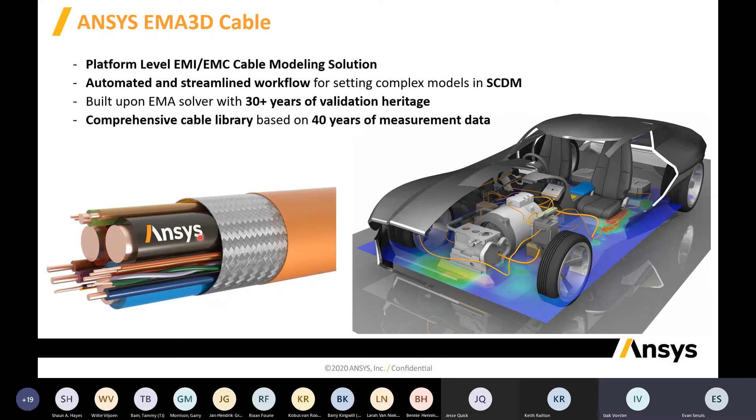Thanks, Evan. That was good. It's interesting to see how Ansys is expanding into other physics as well. I like that virtual reality, we should actually post a link for all the attendees about how that engine was simulated. All right, last up, we're running a bit late, I apologize—you can see there's so much to say.

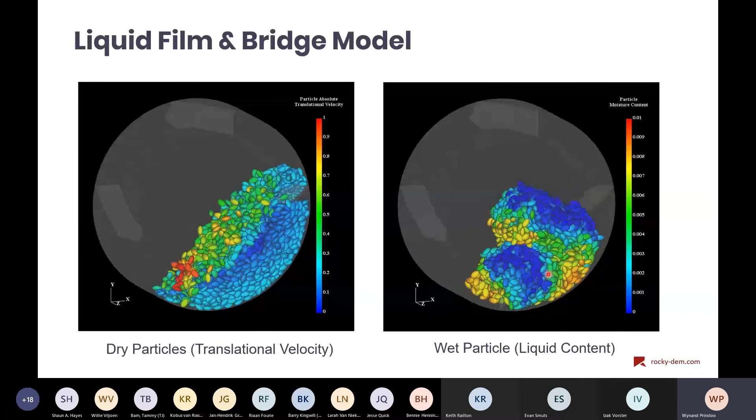Probably one of the bigger additions in 4.3 was the fact that they added volume filling. So previously you had to have an inlet, and then you had to spend a bit of time at the start of your simulation to fill volumes manually, like shown here. But in 4.3, they added volume fill, which allows you to initialize your system already full of particles.

As they show you, this is just an example, but something like this could have taken 21 hours just for the filling process. Now that can happen automatically in more or less 10 minutes.

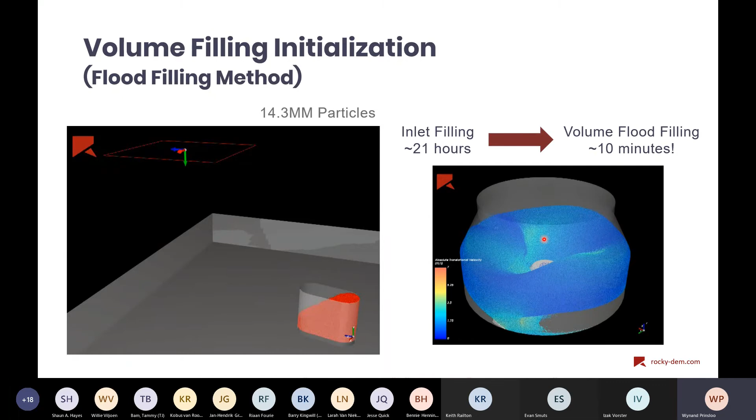This can be done with spherical particles as well as shaped particles inside of Rocky at the moment. So you can fill just a box volume, or you can have a specific geometry be filled to a certain level and so forth. You can actually base the volume filling off of geometry boundaries as well.

Another nice feature added in 4.3 was the fact that the contacts between particles, and the contacts between particles and boundaries, has been added as a separate entity in the tree. So you can post-process contacts separately from Rocky 4.3 onwards.

You can visualize where contacts are happening, and you can also extract information for the contacts, such as contact forces and so forth. This can also be isolated to certain particle groups or to certain boundaries. So you can, for instance, isolate all the contacts on a single boundary only, to see what happened with the contacts on that specific boundary.

So there's just a lot more post-processing capabilities because of this feature. Those were the major features from 4.3 I wanted to highlight.

So let's jump into 4.4, which is the version that was released a couple of weeks ago. Firstly, there's just a couple of very nice quality of life features. The first one is the fact that you can now, instead of using an inlet or a volume fill,

you can read in a CSV file to actually position particles in space, instead of just chucking them into your simulation at a specific point. So your CSV file can have a position, X, Y, and Z location where the particle should be initiated.

You can define things such as the rotation of that particle, as well as at what time it should be added to your simulation, and velocities and so forth. So you can actually physically go and place, with the CSV file, particles at X, Y, and Z locations in space. This allows us to build up complex particle interactions.

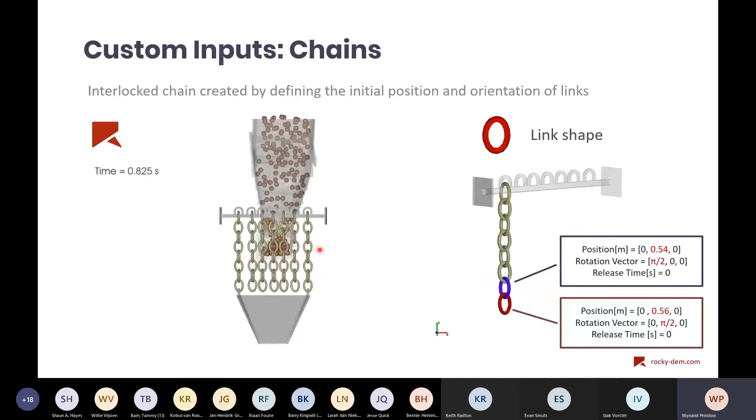For instance, if we want to simulate a chain, we can define a CSV file that initiates these particles already interlinked. Then when they hang under gravity, they will actually interact with each other, and we can get accurate chain type simulations. This was something you could do previously with a bit of a hack, if you positioned volume fills at specific locations and got each volume fill to only drop in one particle.

You can already imagine it gets quite complex and takes quite a bit of time. Now you can simply type up an Excel file and read that into Rocky, and it will initiate your chain for you. You can do very complex particle interactions because you can manually decide where all those particles are placed in space.

Another feature is they added the capability of... sorry, this video struggles a bit. I'm just going to play it outside of presenter mode for you guys. You should be able to see it now.

You can now manually define the center of mass and moments of inertia for a particle. So you can offset particles' centers of mass and inertia if you want to see the effect that would have on something like this, for instance.

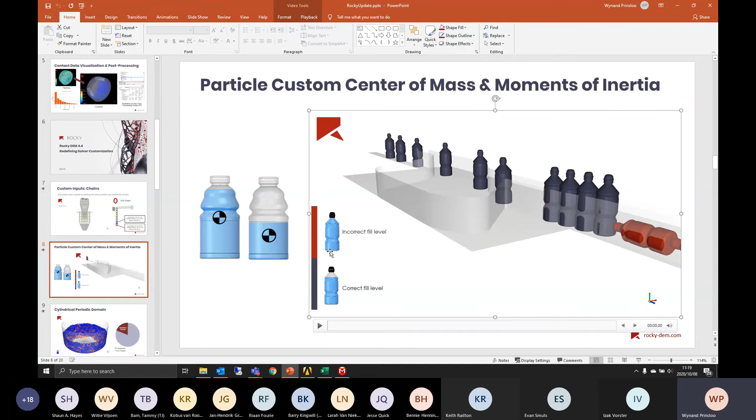Here we have the same particle shape, which is just a bottle filled to a certain extent. But based on the fill, we are changing for some of these bottles the location of the center of mass, so we can see the effect that'll have as it moves through our system. Let's jump back into presenter mode here, get the laser back.

They have also added the cylindrical periodic domain option. Currently in previous versions, you could do translational periodicity for your boundaries, which we used a lot for mills, for instance. But in the new version, you can have a cyclic region. In this example, for this model, they only physically modeled a 90 degree slice, just a pie slice.

We just tell it that everything leaving one boundary should enter the other boundary based on a rotational coordinate system. That will definitely speed up your system a lot—in this example, by modeling only 90 degrees, we're almost 4 times as fast. Not exactly, because there's a bit of overhead for calculating where the particles should be added back to your system, but this can save you an immense amount of time for these cylindrical rotational type of systems.

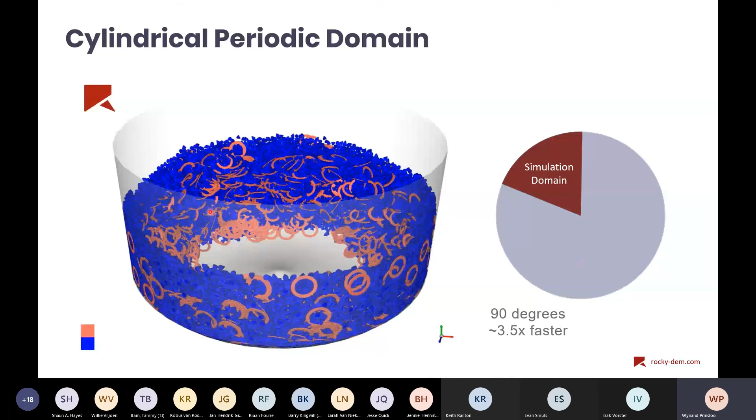The big addition for 4.4 is that they have finally included a solver API. By using C++ modules or scripting files, users can now actually change what is happening inside the solver. Previously we could use Python to change pre-processing and post-processing operations or automate that, which we can still do. But now by using C++, we can actually affect the solver itself—we can change the calculations the solver physically does by writing C++ modules for Rocky.

Currently, the solver API is focused on applying different options to the particles themselves. We can affect the body forces particles experience, change the contact force model, change the joint force model for flexible particles, and also change the size and mass of particles in our simulation based on certain parameters, as well as change how heat is transferred to the particles.

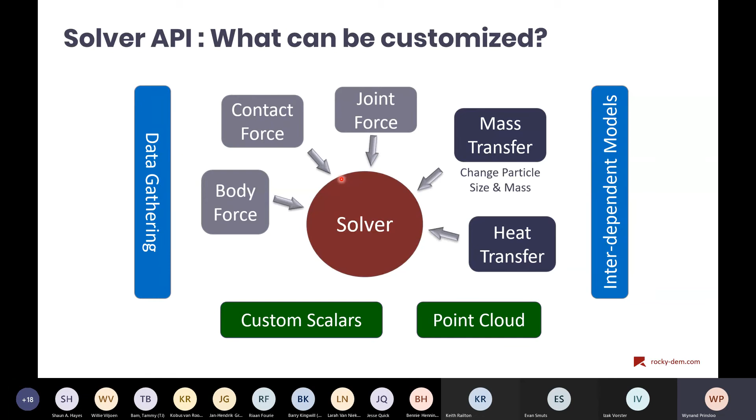So it's very particle focused at the moment, but on the roadmap for future releases is to also allow API access to things such as your motion frames, so you can make motion frames functions of other simulation variables and so forth. But for now, it's focused on the particles.

When you write the module and add it to your system, the inputs you define in your C++ code will actually be exposed as variables in the Rocky interface that you can set values for. It's fully integrated into the interface once you compile and add your module to Rocky.

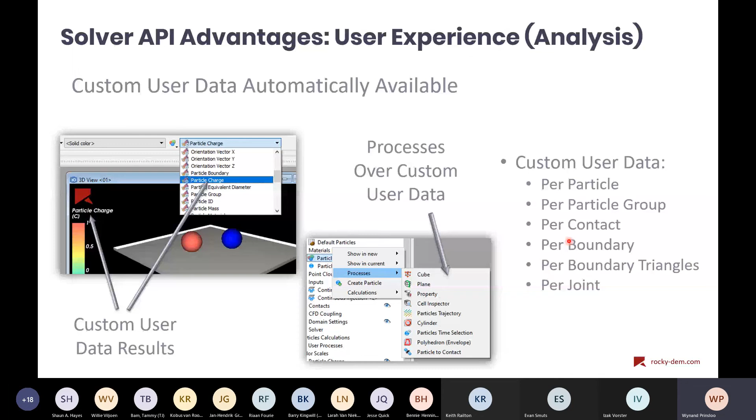Your post-processing values defined inside your module will also be able to use the standard post-processing algorithms in Rocky. So if you have custom outputs, you'll be able to see them in contour plots, and you'll also be able to create custom user processes based on the custom outputs you define in your C++ modules. Just to give you a couple of ideas of how these can be used.

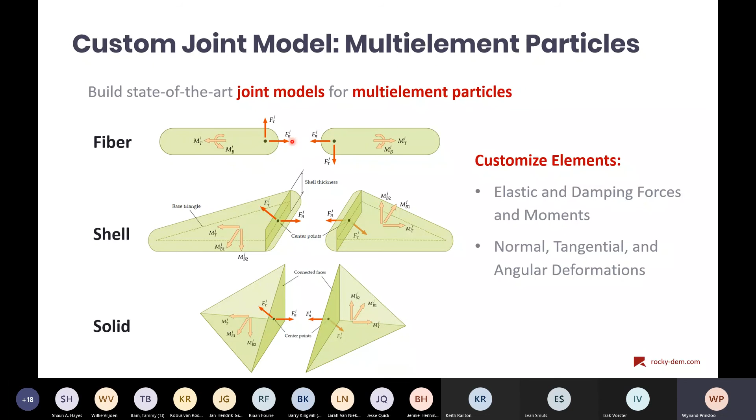So you can do custom things like that. For our flexible particles, we can affect the joint forces. When Rocky does flexible fibers or shells, it actually has little elements that it connects together with joints, and you can affect these joint forces now with the solver API.

An example of where that was used: in this case, we have a little wheel moving over a carpet. Currently, by default, these fibers are isotropic, so you can see the effect of that. But by using the solver API, we can change the stiffnesses in different directions, making anisotropic fibers, and affect how our simulation will respond to something such as a wheel moving over a carpet. That's not necessarily very valuable in the mining industry, but it's interesting to look at and opens up a lot of different options for the use of Rocky.

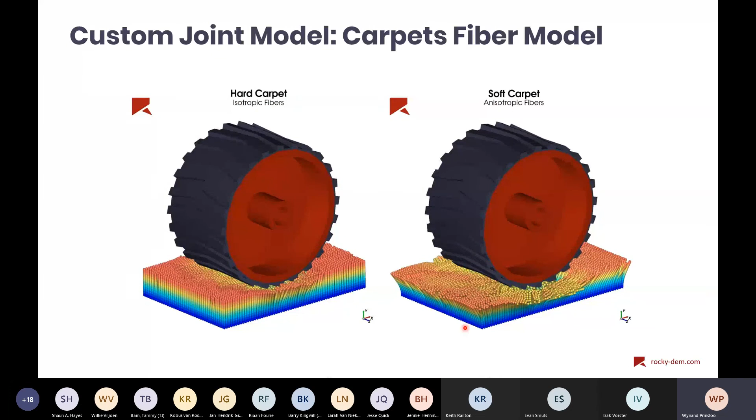Then one of the very big features that I think we'll see the most use of is that, along with the solver API we now have, you can also import point clouds which contain loading information. You can import point clouds that have information on electromagnetic fields as well as flow fields, and then by using the solver API, you can have the particles be affected by these fields based on certain body forces that you define as a function of these fields.

To give an example of where that's been used: in this example, we have particles flowing through a system, and these are magnets being switched on and off during the simulation time. You can see how the magnet actually affects our particles. In the background, we'd generate a point cloud for the electromagnetic field in something such as Maxwell, import that field, and then write a solver API that says, when a particle passes through that field, it experiences a certain amount of body force based on the electromagnetic field. You can then get magnetism into these systems and see how your particles are affected by magnetic fields. This is something people have been asking for a while, and having that functionality will definitely add a lot of value, and again allow us to do much more interesting simulations.

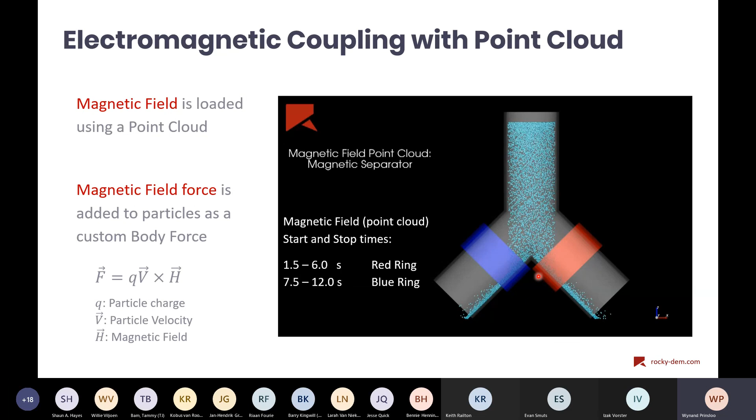Obviously when working with a solver API like this, it's going to be in C++ code, so it's relatively complex, but ESSS have made available a lot of resources to get users going and up to speed with the solver API. One of the best available resources will be the code examples available within the documentation of Rocky.

In many cases, you'll never have to code something completely from scratch. You'll get an example code they've already created and just change the values to get it to do what you want, much the same way as we do for Fluent UDFs. There's also a reference guide that tells you all the functions and codes that can be used in the API, and ESSS will also be creating workshops and tutorials to give you a better idea of how that works.

With this solver API, along with the Python scripting API we've already had in the past, this really gives us the opportunity to modify Rocky to a very large extent, automate it, and do very complex simulations. I'm definitely very excited to see all the things that can be done with this API, as well as how they extend it in the future.